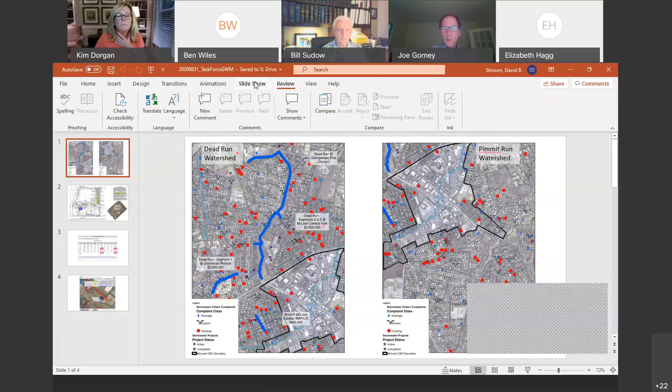I'd like to say that Catie Torgersen is here. We were also hoping to have Camlyn Lewis, another staff member. Catie is with the Department of Public Works and Environmental Services, in our stormwater planning division. Camlyn, who we've been having internal meetings with, is from Land Development Services. So Catie covers the stormwater planning side, and Camlyn is involved with the Land Development Services, or site review side, getting into the nuts and bolts of the regulation when projects come through. So what we tried to do was bring an appreciation to the various stormwater issues and criteria from the perspective of land use planning, environmental planning, stormwater planning, and site review as well.

Last time there were some questions about the various things happening in the McLean CBC area. So what Catie has done to start the conversation is some analysis of what's actually going on in the McLean CBC. As we talked about in the last meeting, there's been quite a bit the county has been involved with. She's looking at the background for the McLean area, and then looked at one of the sites recently developed, the Signet site, and a hypothetical development scenario. At the end of the day, based on that information, we hope there are some possibilities for how to proceed with stormwater language in particular, and we want this to open up the conversation. At this point, I'd like to turn it over to Catie to talk about the information she's put together for this meeting.

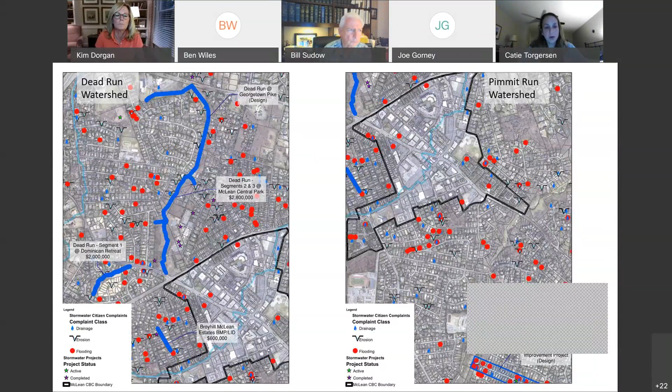Hello, everyone. I'm with the Stormwater Planning Division, and I'll give you an overview of the McLean CBC area and the surrounding neighborhoods.

The city is on a drainage divide, so the northern half drains to the Dead Run watershed, and the southern part drains to the Pimmit Run watershed. Much of the area in McLean was constructed prior to stormwater water quality and quantity control regulations, so you see older stormwater infrastructure, like the pipe system, and few detention ponds to help slow the water down. In essence, water that falls on the CBC runs down through the pipe system and drains into McLean Central Park, where the Dead Run stream starts. On the southern side, it drains to the confluence of what's known as Saucy Branch and Pimmit Run. In both of these watersheds, the lack of detention and stormwater management infrastructure has led to significant structural, yard, and road flooding in the surrounding neighborhoods.

This has also caused significant stream erosion. The red dots represent the flooding complaints the county has received, as well as erosion and other drainage-associated complaints.

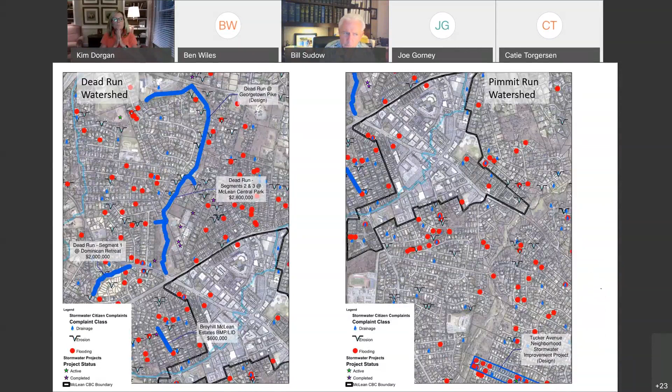We're trying to address problems at the stream, but it helps to take more of a watershed approach and try to stop and slow the water at the source, right in the CBC area. As it stands now, the area is highly impervious, so as it redevelops, hopefully you'll see a reduction in impervious surface and more green space, with water quality and quantity pieces integrated into the designs and development.

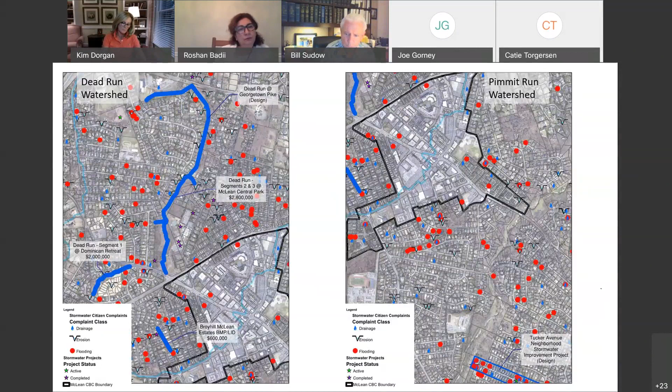On the next slide, we go over the recent development, the Signet condominium project. This converted what was a parking lot into a condominium complex with some green space. I think this highlights the type of stormwater management you see on these projects. It's a larger site, but it reduced the amount of imperviousness on the site by about 15%, and it took one of the few existing underground detention facilities, large vaults that hold, store, and release water slowly.

It replaced an older one with a new one, which helped really with the quantity control for some of these larger storms. It also integrated water quality best management practices like bioretention planters and permeable pavement into the design, which helps filter pollutants out of the water before it runs into the pipe system. But it also provides some quantity control, holding and storing some water too.

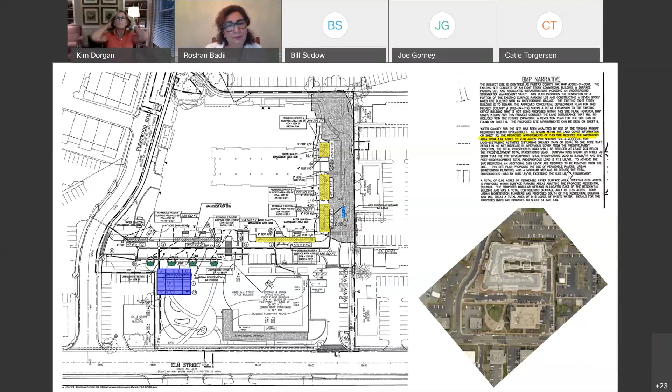On the stormwater world, there's kind of two areas that we focus on: the water quality piece and the water quantity piece, which goes towards more the flood protection.

For quality, we're generally looking at really frequent storms, because you want to design for the storms you see the most. So the 1-inch storm is what you see a lot of these best management practices designed for, like permeable pavements, bioretention areas, and bioswales, since they're designed for the more frequent storms.

But when you look at flood protection, you're generally going to focus on the larger storms that may get out of the conveyance system or generate a lot of rainwater. And that's the 10-year to 100-year storm.

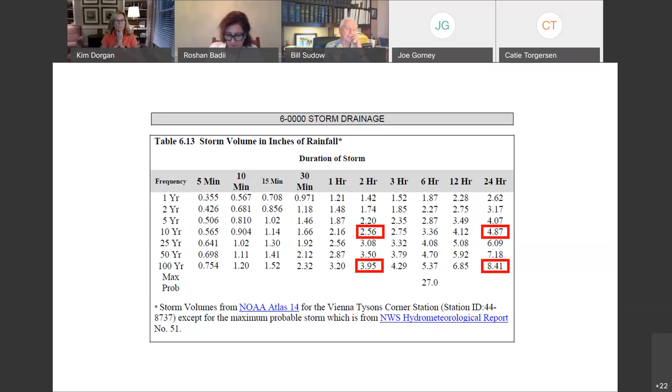In the design world, they like to look at the 24-hour storm. In the real-time world, especially recently, we've been looking at these cloudbursts that come with thunderstorms, which in a 2-hour time frame drop a couple inches of rain and can cause a lot of havoc, especially where you don't have the infrastructure you need. So for this discussion, we're looking at the 10-year 2-hour storm, which is 2.56 inches of rain that would fall. Keeping that in mind, let's go to the next slide.

I wanted to put this in perspective, what this means in terms of detaining 2.56 inches of rain to help mitigate flooding.

So I took this site, you may all be familiar with it. This is the Wells Fargo Bank and parking lot right at the corner of Old Dominion Drive and Beverly Road. It's a smaller one.

Basically, to come up with a volume of water that would fall on the site that would need to be managed, I assumed this site was to go and redevelop. Right now it's probably at least 90% impervious. So you'd assume maybe there'd be a slight reduction in the amount of imperviousness. It's a smaller lot, so they're still trying to get a lot onto that site, but maybe you'd assume like 85% imperviousness. So the lot's 85% paved, and any rain that would fall on there would immediately run off the site.

So we would want to catch it, capturing that 2.5 inches of rain that would fall. You'd assume that under our normal stormwater regulations, the minimum requirements, they would have to detain some water because of the older infrastructure and the way the regulations are written. You'd assume there would be some detention, and they may get that through putting in water quality BMPs, maybe some bioretention or something along those lines.

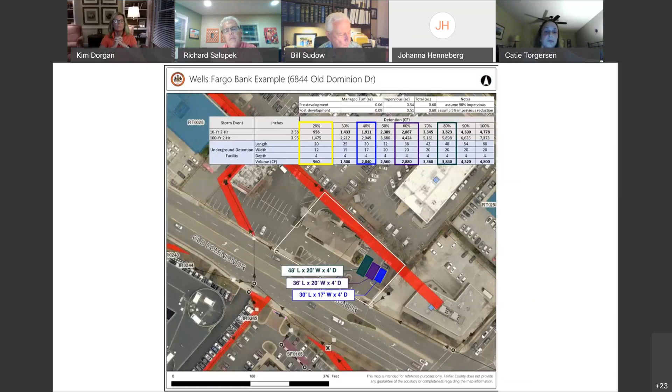I think the point I made last time, and I'd like to make again, is that, as Bill was alluding to a moment ago, there's a significant cost impact to stormwater management for a development project. I understand the need to improve the existing condition, but if we're trying to encourage development, I don't think we can put a standard for the CBC that's higher than anywhere else in the county, because it represents a disincentive to developers to want to build in McLean if they have to build projects with stormwater management infrastructure that's higher than if they were not in the CBC.

And so all I'm suggesting is that we not have a higher standard, but just follow the standard. Well, and I just want to add to your point, Rich, that I know in the district they've instituted several green roof options, particularly for buildings north of Pennsylvania Avenue, where the runoff is just massive, ending up flooding into Southwest. The question, to Rich's point: if you had a green roof that absorbed a lot of this rainfall, wouldn't that be different in terms of treatment and cost?

Yes, green roofs can help, but I think developers find them to be fairly costly. So the idea with a vault—and this is very typical, people move from dry ponds to vaults underground—is that you can utilize the space on top of it, so it doesn't take away any of your space. But green roofs can provide some storage as well.

Do current county-wide stormwater management regulations give credence to green roofs as effective stormwater management devices or not? Yes, that's one of the practices. So regardless of cost, the county still recognizes them as legitimate stormwater management components if you choose to do so? Right, yes.

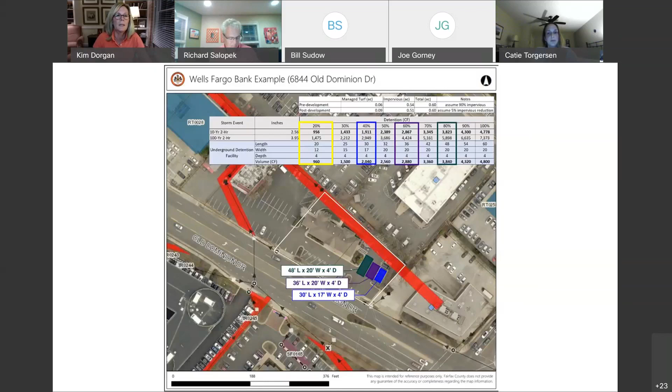Well, that's an excellent point and suggestion. I guess I didn't realize the impact that impervious surfaces and the CBC had downstream. So to the extent, as Catie was pointing out, that we've got flooding, drainage, and erosion issues as a result of that, then you're right, we need to address it, and we need to address it appropriately.

So the question is again that balance, if we can do it in a way... we're going to have to figure out perhaps another incentive or another way to encourage development even with that requirement, because it is so important to the environment in the surrounding McLean area. So we certainly want to address those issues.

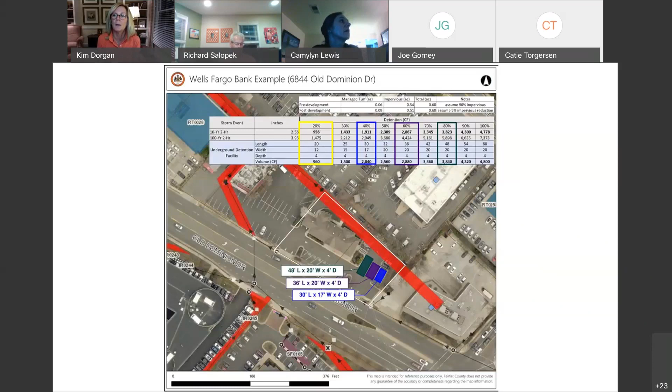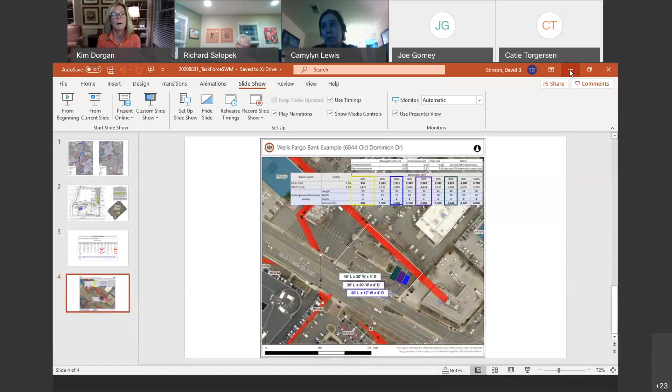And I guess the final point would be that the treatment shouldn't mismatch what's being required of the developer. So if the 2-hour storm is the big issue, but the requirements say 24-hour storm, there may be a mismatch there. So we may not be meeting what McLean needs, and therefore that policy guidance may point people in the right direction.

And I see that Camylyn has joined us as well. So yes, Joe, I guess the thing is we all need to consider, well, where do we actually put the water? You have to put it somewhere. And I guess an area that's redeveloping, one of the things that allows it to redevelop is that you have infrastructure. When you have an older area redeveloping, you need roads, but you also need stormwater management, the conveyance system to take the water away from those areas so it doesn't flood on the local site. So you either have to take the water away or you have to keep it, otherwise it's going to flood something.

So thinking about the whole package here and the concept of keeping water on site, if you don't keep the water on site, then there's probably going to have to be something done to the infrastructure to take the water away, and somebody has to pay for it. Either it gets paid for by keeping the water on site for storage, or it gets paid for through taxes to upgrade the infrastructure to take the water away. And that has other impacts, as we know, downstream erosion and flooding on somebody else's property. So I think we have to do something with the water.

The 12 land units proposed in the draft plan text are organized by zones that were developed during the 2018 vision plan. As most of you know, this is when the concept of the center, general, and edge zone was developed. Land units C1 and C2 are located in the center zone, G1 through G4 are located in the general zone, and E1 through E6 are located in the edge zone.

The center zone was divided into 2 land units to depict the area eligible for the bonus height area, as well as the area that does not qualify for the bonus height area.

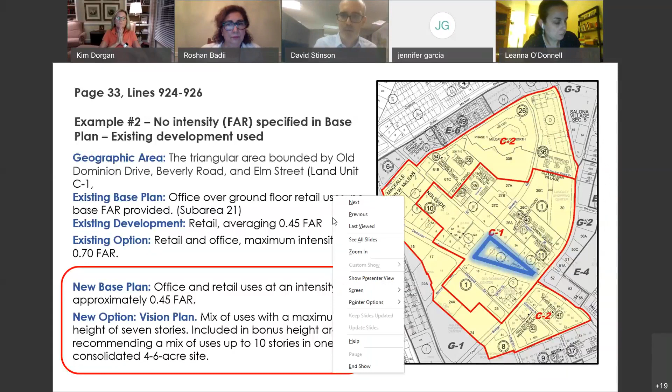And then I'll provide one more example. This final example is the area located in land unit C2, between Beverly Road, Old Chain Bridge Road, and south of Fleetwood Drive. In this case, the existing base plan recommends retail and office at an intensity of 0.35 FAR. The existing development in this area includes office and self-storage at an average intensity of 1.0 FAR. So again, the new base plan for this area takes into account the existing FAR and proposes office and retail uses up to 1.0 FAR.

And again, the new option for this area, since it's in C2, is a maximum height of 7 stories. So like the other examples, there's no need to carry the option forward because the form-based plan allows more flexibility in terms of intensity and uses.

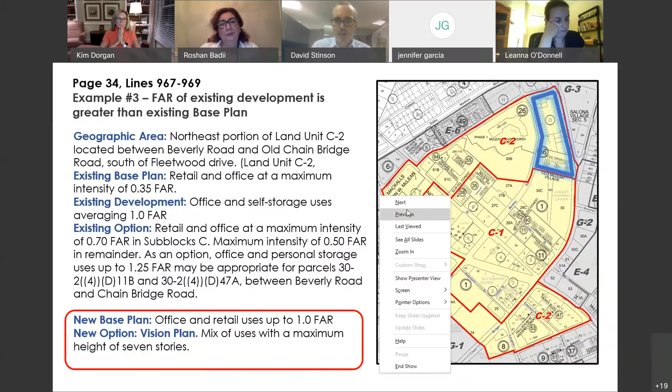So does anyone have any questions? Okay, Rich.

I don't understand the whole idea behind having a base plan recommendation and an optional level of development.

Right. Well, the base basically reflects the existing uses. So if someone wants to make a change, let's say there's an office building and someone wants to convert some space on the first floor to retail, they just want to make a minor change through a special exception or special permit, then that's where the base plan comes into play. Now if someone wants to completely redevelop the site up to, say, 7 stories, then they would use the option. But we need the base plan in case someone wants to make a minor change.

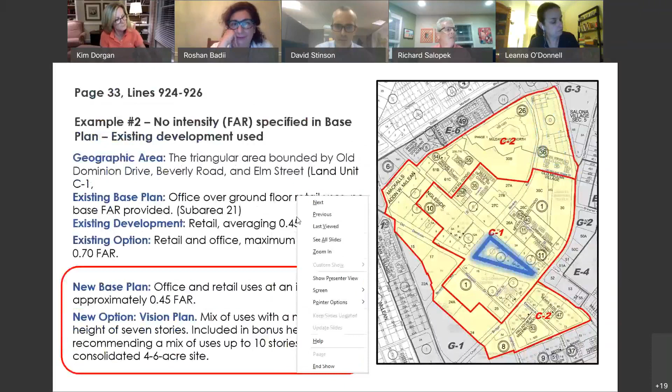And that's why you have to have all these different little areas. So we can't achieve our goal, which is to not have so many sub areas. Because when I look at this, on page 32, going up to line 912, but for C1, if you go to page 33, there are 1, 2, 3, 4, 5 additional base plan areas. So essentially this C1 is actually made up of 5 subzones. And this seems equally, if not more complex than what we have now. So can you tell me why it isn't?

I think the reason we have so many zones in C1, for example, is because there are a lot of different intensities within C1 in terms of the existing development. So what the base plan does, like I've said before, is basically reflect what's there today, the existing development. So in case someone on, say, a 0.5 FAR office building wants to make a change without redeveloping the site, they need this base plan for things like special exceptions and special permits.

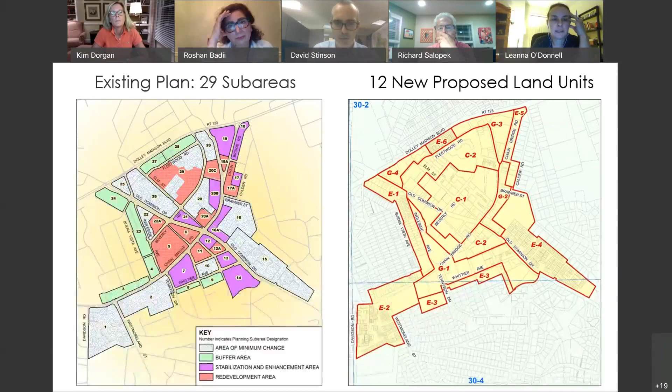Rich, you are right that in the evaluation of the 29 sub areas, this is Leanna, we have these different scenarios where it's not as straightforward as we would have liked to be able to say this one entire area has a base plan of 0.35, let's leave it at that. It can be 0.35 for the center zone as a base plan. And David went through the 3 situations we have. We have one where there's a clear base plan now for that sub area. We have situations where it's not clear in some of our subunits, where it just says office and retail without an intensity calculation.

And then we went back and looked to see what had occurred on the ground. Part of the effort is to check the existing base plan against what has been built, so that in the future, if someone were to come in and say convert a bank to a restaurant, they come in for a review, we don't want someone to then not be in conformance with the plan. So what we're trying to do is balance being clear about what the current base plan is for a situation like that, while trying not to be overly complicated.

I think by mapping these, one thought we had was to map the areas in C1, for example, like David went through some of those examples, and then perhaps use a chart to show what the existing base plans are for those particular areas, so it's not quite so much text to help reflect what the base plan is.

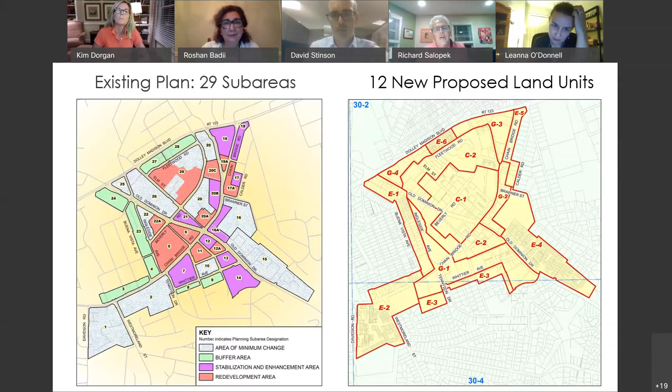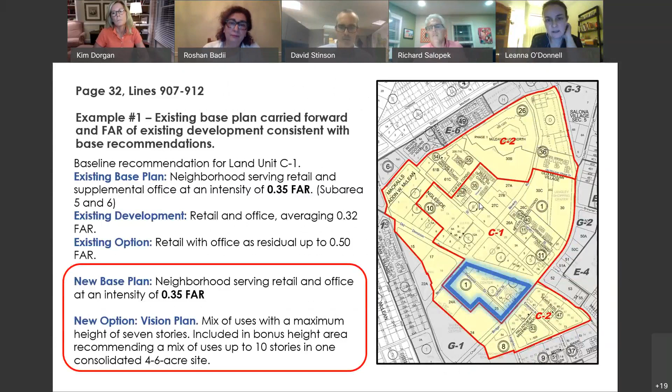Yeah, and so since we've drafted the text, we've gone back to map those. So one idea, and we'd welcome the task force's feedback on it, is to use these maps instead, with more of an introduction to the base plan and what it means, and what it means if you come in for a special exception or special permit. Can you go to the one, David, towards the end that shows C1 and how we might map it with a chart at the end? Which description on page 32 is the Ashby, for example? I can't even tell.

So this is one idea. This gets to C1. Right, so this is graphically showing the 1, 2, 3, 4, 5, 6 sub areas of C1. And so now you're going to do this for every single sub area? So we're going to end up with maybe more sub areas than we had before. If C1 has 6, and you break all of these down, how many do we end up having? I mean, is it basically the same?

50. I haven't counted, I don't know that we have quite as many. C1 is an example of where we have quite a few, I think. But this is an idea, and this is draft language, but for example, if we said the base plan for C1 ranges from 0.35 to 0.6, so we're just generalizing that even more, and then if the reader needs to know what the specific base plan is in a sub-geography of this, they could find that also in a table.

Well, I think that makes a lot of sense, because when I see this it's more comprehensible. And under the C1 section, there was a heading for part 1, part 2, part 3, part 4, part 5, part 6 with the base area recommendation. Then I can graphically look at where it is and read what the base recommendation is for it, so that we can at least understand for each parcel what's going on.

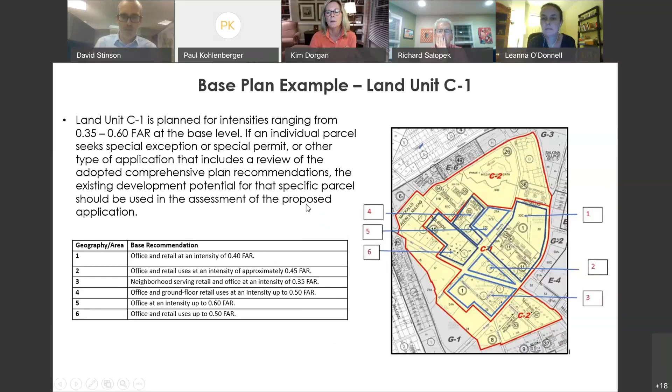Thank you, Leanna. All right, let's talk for a moment, and David, if you would address this about the area we talked about with Jim Peoples on Holmes Place, and why you think that we ought to stick with the original language and our new sub areas.

As you can see on the slide, the task force voted last time to create a 75-foot buffer on the southern and western portion of the Balducci Shopping Center, or I think it's called McLean Square. And this red line, so basically the proposal was to bifurcate this parcel and put this area on the other side of this red line into the edge zone. As you can see, here's the building footprint of the Balducci's store, and then this is the other retail development on the south side of the shopping center.

So if this were to be bifurcated, this area south of this line would become part of the edge zone, and this area would remain in the green zone, or the general zone. And if that were to happen, since in the edge zone we're bringing forward the existing plan recommendations, we're not changing the recommendations in the edge zone. So if we do this, this portion right now is classified as retail and office up to 0.5 FAR. So that area wouldn't be eligible for the form-based plan, it would just be eligible again for retail and office up to 0.5 FAR, while the remainder of the parcel would be eligible for up to 5 stories and a mix of uses.

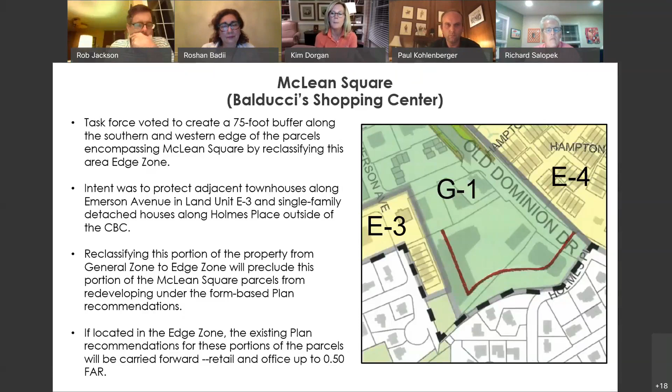Any other thoughts or comments on this? Again, we'll look at all the rest of this language as we come up in September. Any other issues from staff, from the task force? Then we'll go to the public.

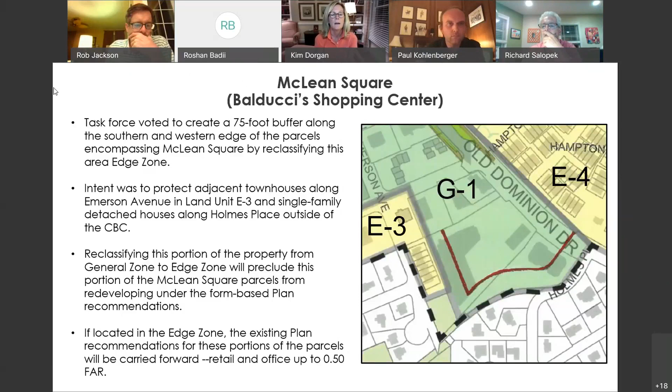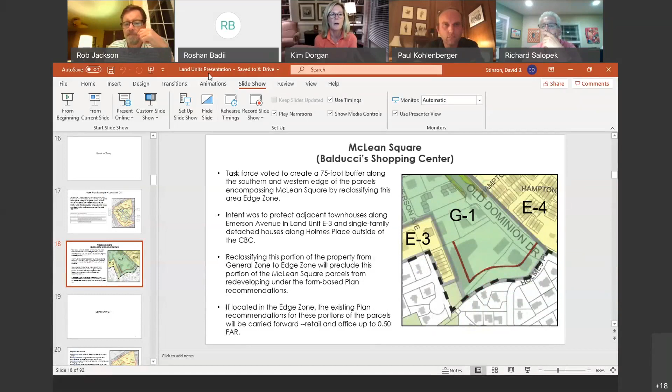Tim, if there is anybody left from attendees, the public who want to say anything. I do want to say on behalf of the task force, and I think the county staff as well, I do appreciate the outreach by a number of HOAs and organizations to county staff to raise concerns or issues, ask questions. It's too bad, obviously, with COVID that we're not able to engage directly with the community, but we do want to hear from you all and appreciate the time and effort that you all have put together to put together presentations and to talk with the individuals. So thank you all for that.

Tim, did we have any questions from the public? I don't see any right now. So just a reminder for those of you attending from the public, you can press star 3 to raise your hand if you're on the phone. If you're over the web, open up the participant pane and go to the bottom right to use the hand raising feature, and I can call your name up.